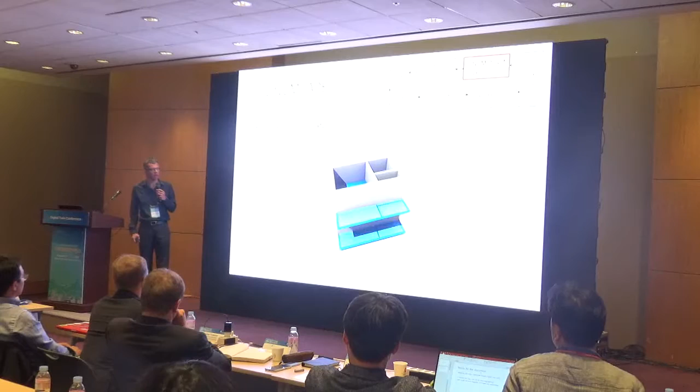Here's a simple example. Let's say in IFC we have information on whether a room is handicap accessible. We would like that information to be available in CityGML.

Because that could be very interesting for certain use cases such as indoor navigation, wayfinding, etc. An ADE allows the ability to extend the CityGML model, which is an object model. One way to do this is to add new attributes to existing objects. Another way is to add new objects to contain specific information of interest.

And thirdly, we also defined a number of code lists, which in our case are specific to Singapore, as that is the context in which we operated, but these could easily be amended to other situations. For example, building types - the general building types, especially residential, that you find in Singapore.

Then, to specify the IFC requirements, we need to identify what information has to be available and in which format. So we adopted grammar rules, in particular triple graph grammar rules, on the basis that on the left-hand side we have an IFC model, which is represented as a graph.

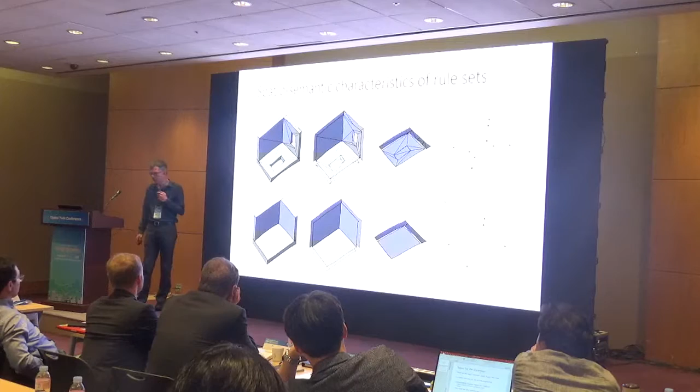The left part, rules 1 through 4, are all focused on a three-dimensional model, whereas the right side rule sets are focused on simply collecting 2D or 2.5D information in the form of floor plans. For each column, the first is interested in 3D volumetric objects, and the second is interested in boundary surfaces, and the same for the floor plan information. So we could get a number of rules.

I'm just showing you a few. So at the top we have an IFC space, which is translated into a building room.

That space has to be part of a story, which can then connect to a story in CityGML, as well as a building that it would be part of, assuming that all that information would have already been made available in CityGML from other sets of rules.

We organize these rules into 3 layers, corresponding to 3 steps. The first are structures that occur in every rule set and are always required—very general things we always need present. The second are rules specific to the target type of building elements, whether 3D or 2D. The third are rules that add the geometry to the spatial semantic units defined in the second step.

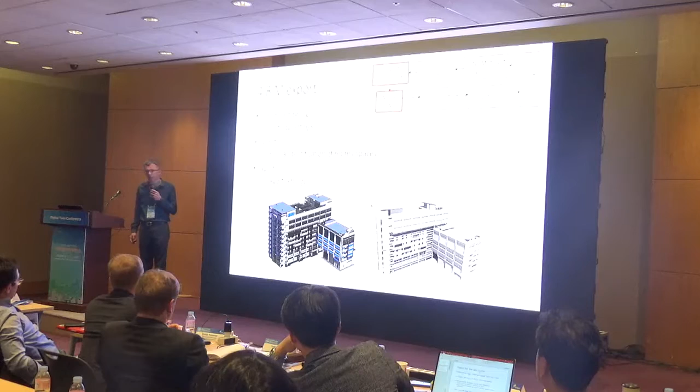Sometimes the requirements specify that rooms have to be available. Not all IFC models necessarily have all the rooms identified, so there might be some manual identification necessary in order to be able to generate the right information.

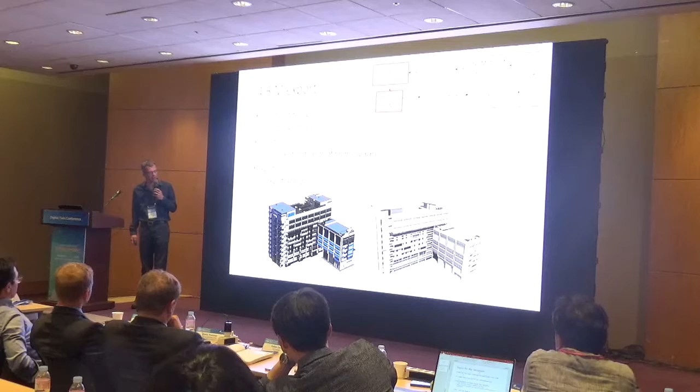At the bottom, the left-hand side is the native BIM model of that real-world building. The right-hand side is the IFC model, and then a conversion applies by selecting a rule set according to a specific use case, and then applying this. On the right-hand side is the CityGML model that resulted from this conversion process.

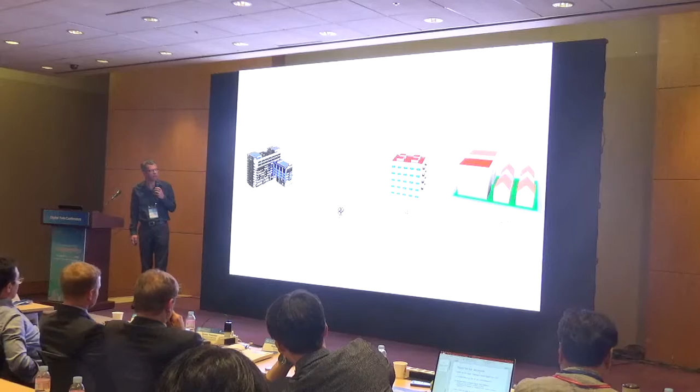This was our outset—some abstract native BIM model going to IFC, CityGML, and to Virtual Singapore. We did this with our real-world building, converted it to IFC, and then to CityGML.

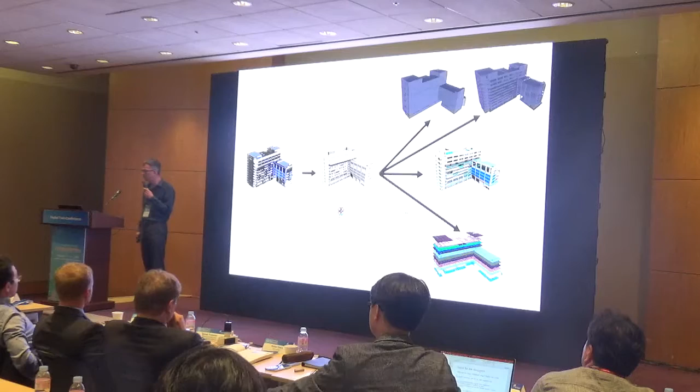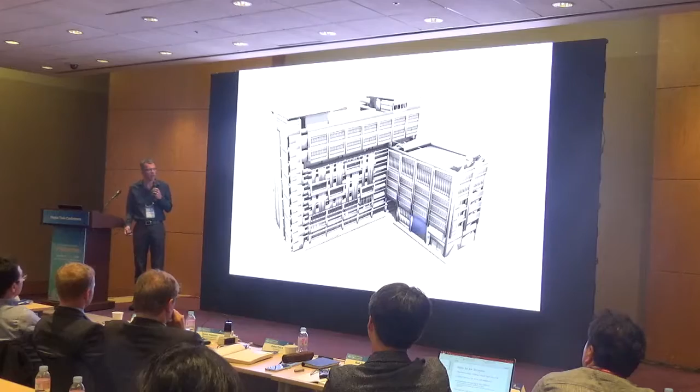But based on the rule set that we use, we could get a lot of different outputs. These could be 3D, 2.5D, focused on volumes of spaces, or focused on surfaces, etc. There is the possibility to base this on different use cases—what a user wants available for a particular task or simulation, information could be selected and presented accordingly.

We didn't leave it at this one building. We collected a number of buildings from our stakeholders, from the government agencies, and applied the conversion to all these models. The process went, I must say, amazingly smoothly.

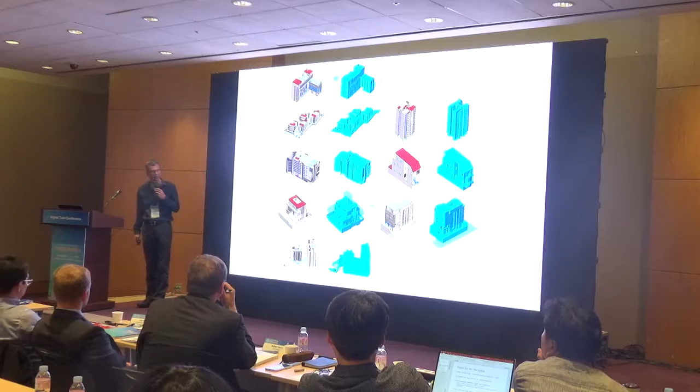It just showed that the rule-based approach was the right approach to allow for the kind of flexibility required, because these building models all came from different sources. They were not all developed by the same agency or the same consultancy, but they all worked remarkably well.

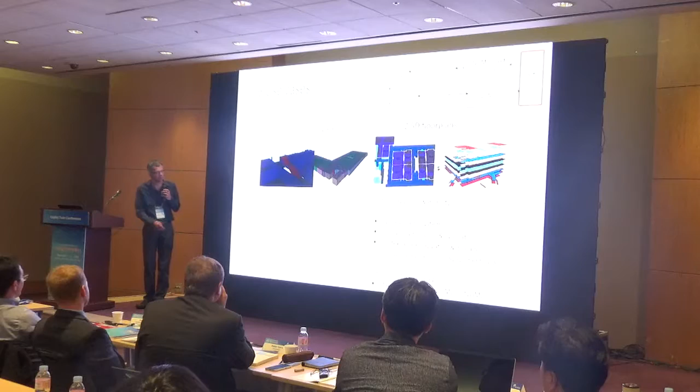So then we get back to the use cases—this is just an excerpt of what might be possible. In the project we focused specifically on use cases relating to 3D rooms or spaces and 2.5D floor plans, considering different potential uses for these. These uses could be further enhanced by linking to additional data such as social data, maintenance history, etc.

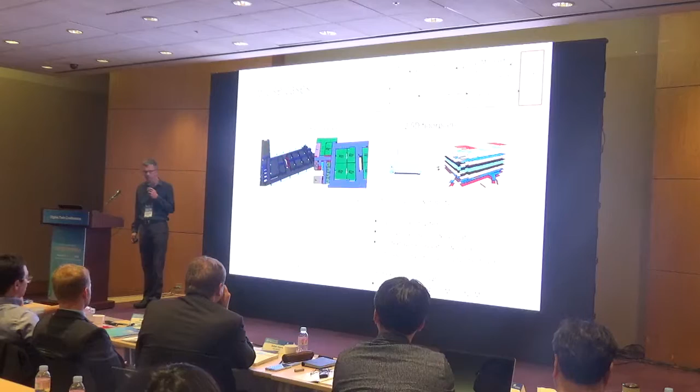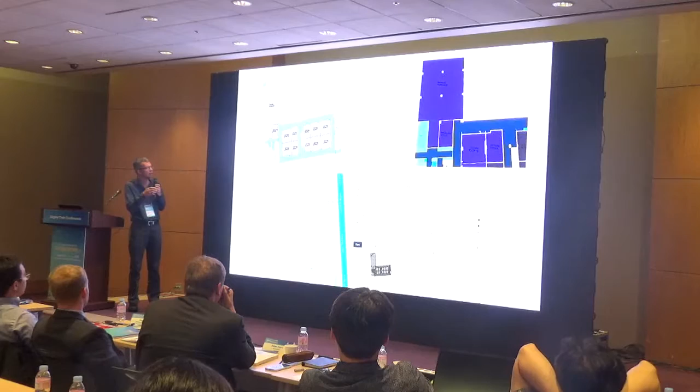This is the example building we focus on most. All this information, the colors representing different types of spaces—whether corridors, toilets, or meeting rooms—and other building information below, was extracted from the BIM model.

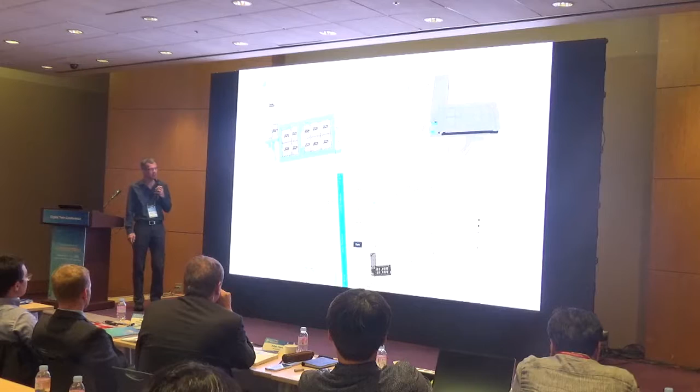All that semantic information also comes from the BIM model. Here you can see an example of a specific room, showing whether it's carpeted, the height, the room number, etc.

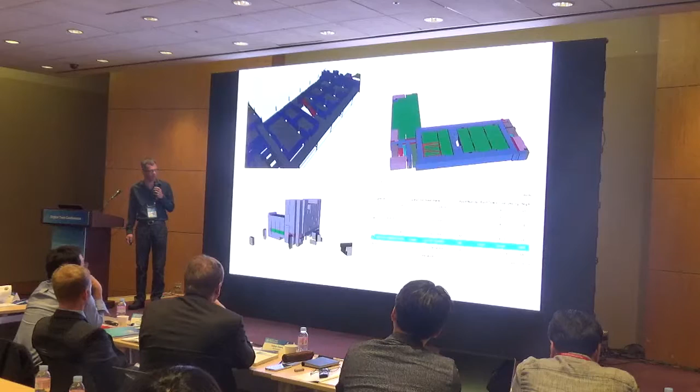To give some background, we used standards—specifically IFC4 as the most recent IFC standard, which had benefits like embedding coordinate systems and improved representation of space boundaries. For CityGML, we adopted CityGML 3.0, which is not yet a released standard, but CityGML 2.0 is already quite old, and good ideas are being embedded into CityGML 3.0 that make it more compatible with IFC. This work has also been used as an example in OGC for developing CityGML 3.0.

Here's an example scenario of how this tool could be used. Let's assume the use case is already known—then the data specification will already be available, and rule sets will already have been created in a rule repository. The actions are to select the model from the IFC model repository, select the rule set from the rule repository, and run the conversion client.

The conversion client can be used in different ways. We have a GUI interface developed as a Java tool, and also a command interface that can be run from the command line. We also had to develop a viewer for CityGML 3.0 since none existed, so we customized the FZK viewer to visualize the CityGML 3.0 models.

We also developed an interface inside FME for those familiar with it and who like using it. You can access the tool as one node in an FME workflow, which makes it very easy to extract various views from the generated 3D CityGML, filter it, and look at whatever might be of interest.

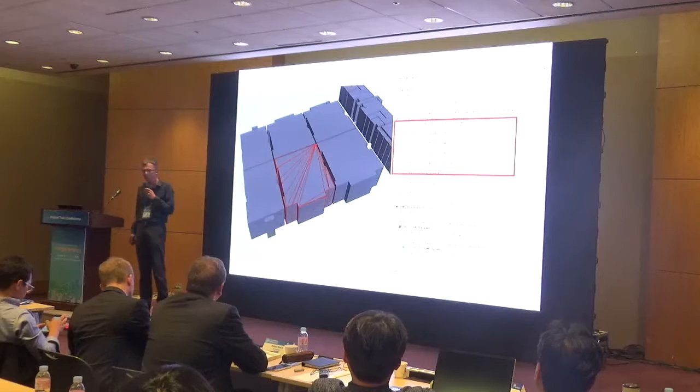Obviously FME does not support the ADE, but all the information can be embedded using straightforward CityGML properties. The downside is that you don't know in advance what information will be available and how to access it. But this shows that information available in BIM did make it into the CityGML model in FME. And I want to conclude my presentation here.